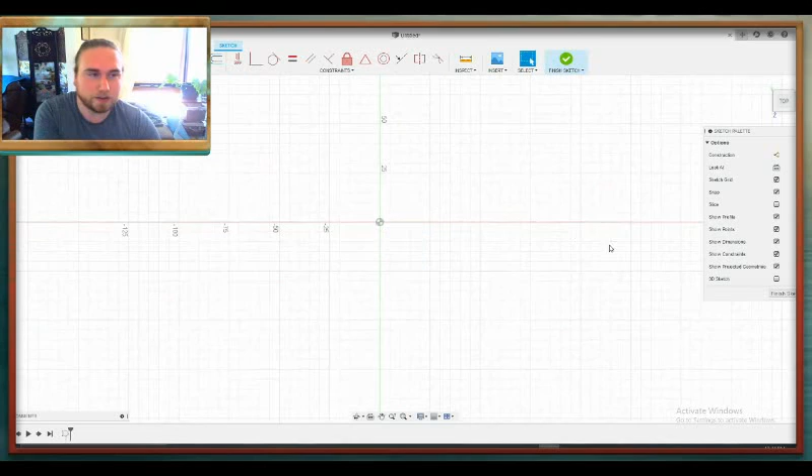Now, first thing is I'll make a quick file. This isn't part of it. You don't need to worry about this if you've already got a file. This is purely just to have something to play with. So we're going to use Fusion 360, make a quick square, put another little square on top of that, and I'm just going to chuck a circle in the middle of that square somewhere.

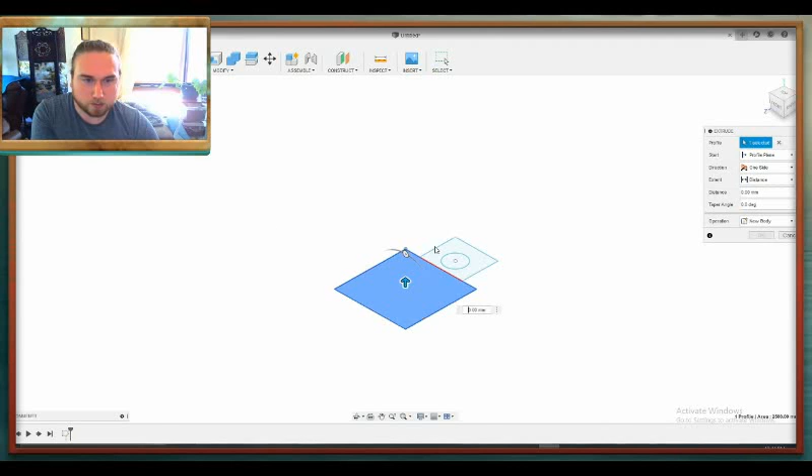Now, this doesn't really matter where it goes. Done. And we're just going to make that a 3D shape, so we're going to extrude it. You can just press E, and we'll make it a centimeter. Cool, so say this is some sort of bracket. I don't know, you're screwing this bottom plate into something, and then something's hooking onto this hole and pulling it this way, or pulling it up or down, or whatever we're going to do. So let's just say this.

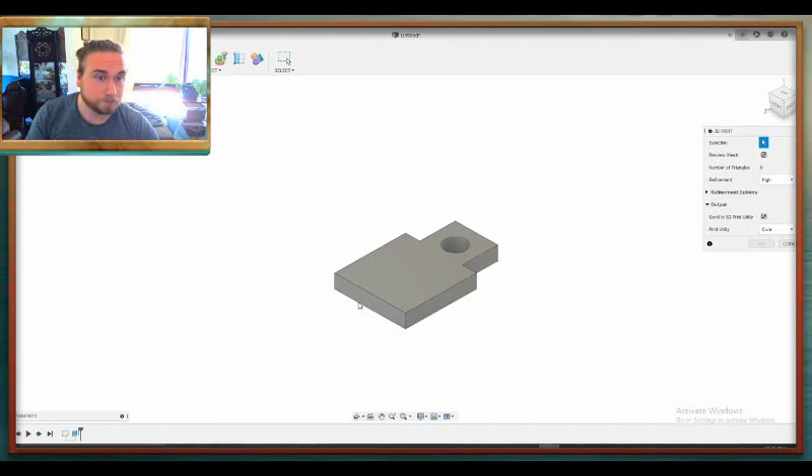There you go, make a 3D print, untick the Cura option, that never really seems to work for me. And then we've got a little file there. So now we have Cura here. And if we just chuck that over there. So, orienting your prints, to make sure that they are nice and strong.

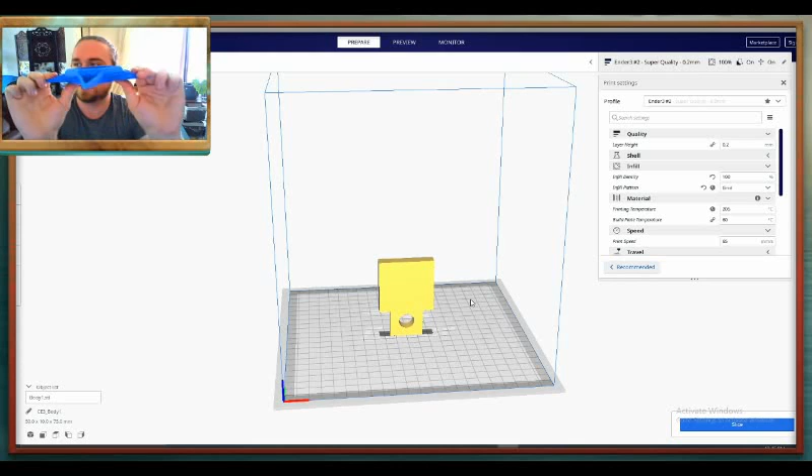Now, PLA isn't a hugely strong material, but it is fairly strong, especially if you orient them properly. Here's something I've designed, give it a good tug, and as long as you're against your layer lines, which is what we'll talk about, so say I'm pulling downwards, so the force is going down, my layer lines are going this way, they're actually resistive, that's going to take a fair bit of force to break that little leg off. It's the same sort of concept, so it's basic force analysis.

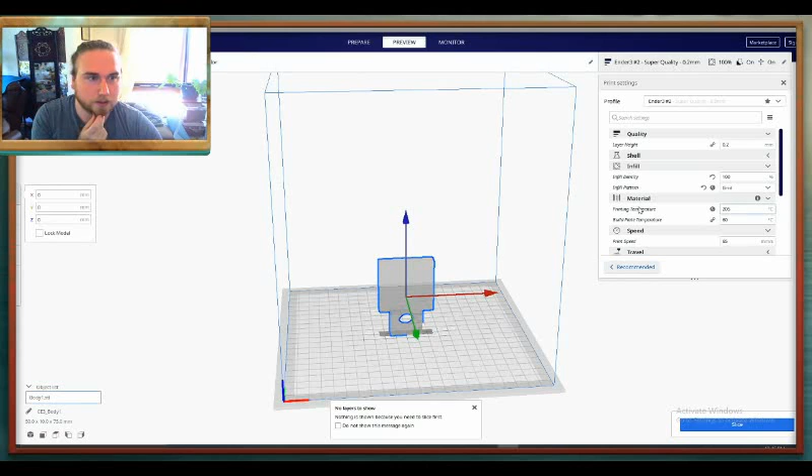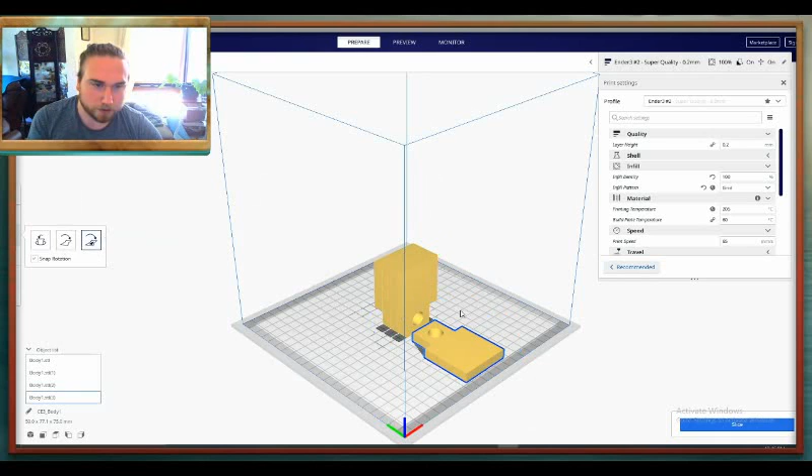So I'm just going to see if I can make this a preview, layer view, and maybe I need to slice it first. Actually, I'm going to duplicate this so we can have different orientations. So it's all about understanding where your layer lines are going to be. So your layer lines are obviously going to be going from the base up, as you probably know if you've 3D printed before. We'll do one of our prints like that. One of our prints, I'll make it the other way around. There we go, like that.

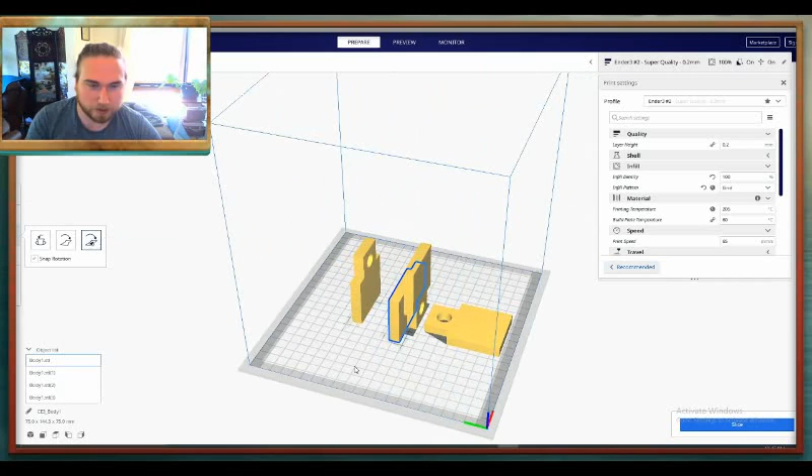One of them I'll do this way. And the other one, I'm just trying to think if there's any other directions really that matters. Not really. That'll probably do. Might just delete the other one. If we slice this, the reason I'm slicing is just to show you the layer lines. Go up the screen a little bit. So if we go preview, layer view.

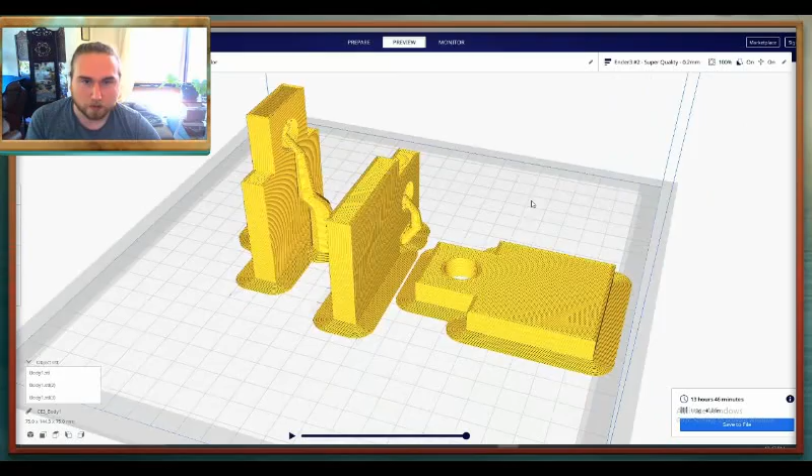So it's kind of hard to see, but there we go. You can see the layer lines going like this, like this, like this. So if we're trying to resist, say this piece is, like I said, maybe you've got 4 screw holes, this is getting screwed on, and then something's clipping onto this little piece, and it's pulling it. So maybe you're attaching a rope or string or something, and it's pulling it that way. So if we, I wonder if it's worth making this so I can draw on it.

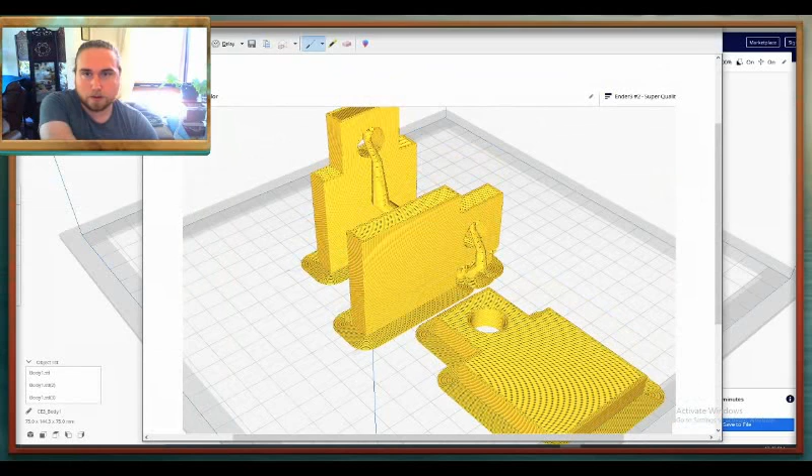So we have this little guy, and so the force is going to be going that way. So it's pulling on that hole. For this one, it's the same thing that way, and for this one up here, it's going straight up. This is what I mean by basic force analysis, sort of just understanding which way the force is going to

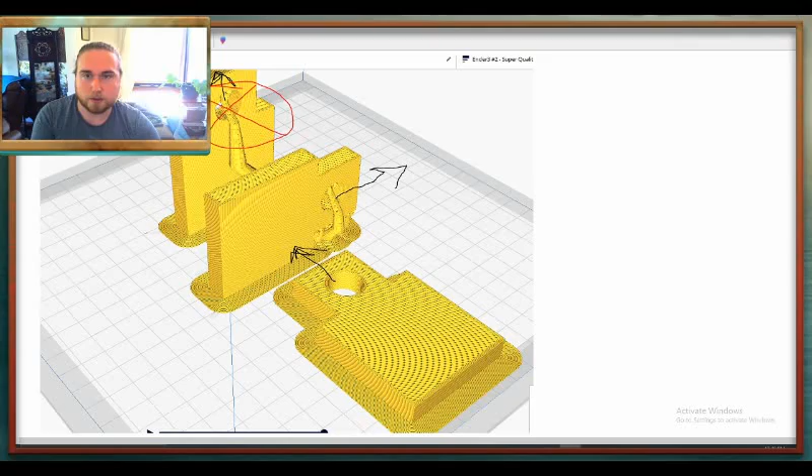be pulling. So the weakest one of these orientations, so it's exactly the same model, it's just how we're rotating it inside Cura. The weakest one is actually going to be this one over here, the one that's upright. This one. That's going to be the worst. And the reason that is, if we look over here, we've got our layer lines. Our layer lines are like this.

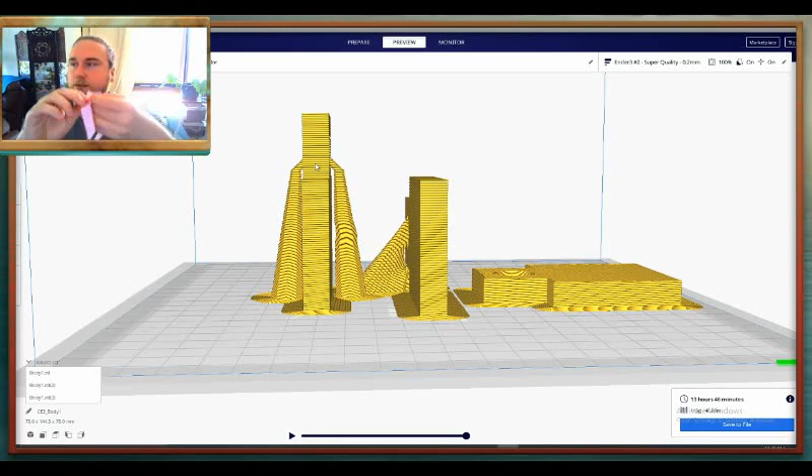If the force is pulling upwards, the weakness in 3D prints, aside from the fact that PLA isn't the strongest material, just inherently, the weakness in the actual 3D prints are these layer lines. They will delaminate, it's called, so the layer lines will separate. I mean, this was done in vase mode. If I sort of just pull this, the layer lines will just delaminate. Like, I'm not putting barely any strength in that.

Whereas if I pull it this way, it takes a lot more strength. Like, I'm pulling as hard as I can. That's not breaking. That's what I mean. This is just PLA. It's one layer. It's vase mode. The weakest print you could probably print on a 3D printer. And just purely by which way I was applying the force was showing how strong it was.

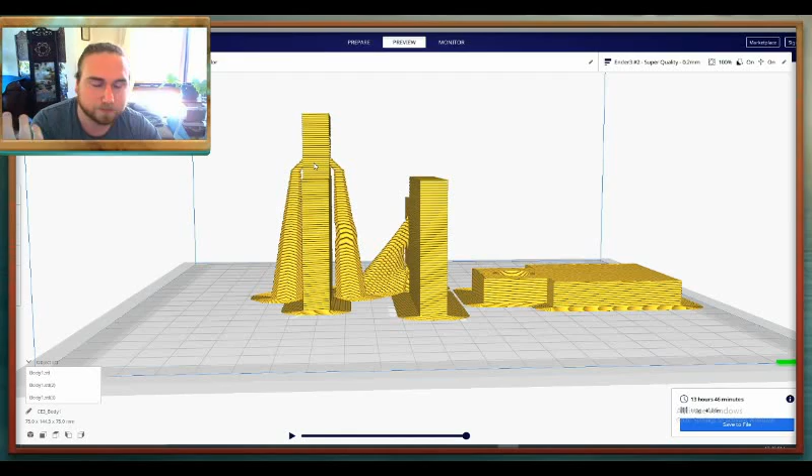So this one would be the absolute worst, the first one here, because the force is pulling straight up, and it's just going to pull those layer lines apart. And that's about it. These two would both be pretty strong. I would most likely choose this one here. Because the layer lines are going this way, they're totally on a different axis. But this is pulling this way, and the layer lines are going this way. So they're totally not going to interact with each other.

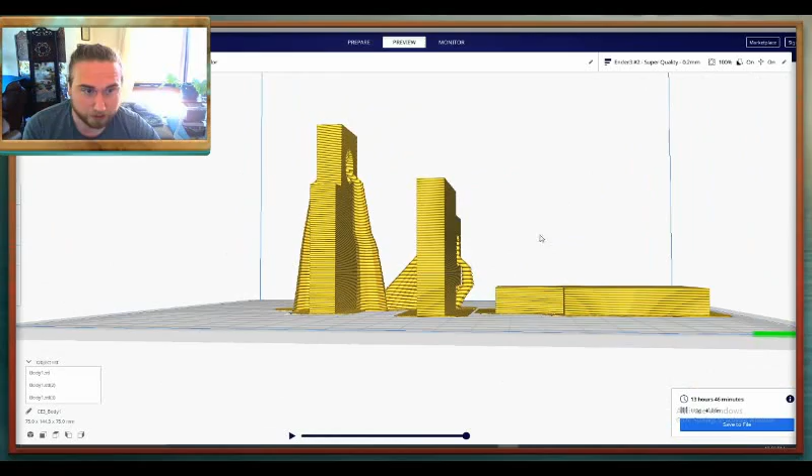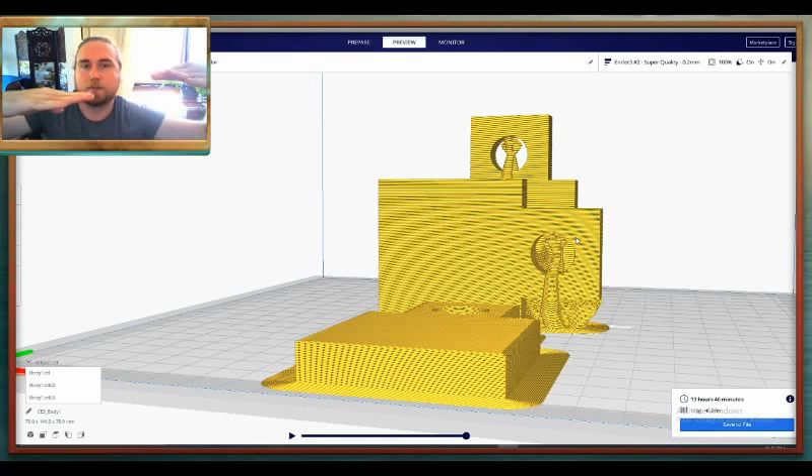The reason I'd probably choose this one over this one is this one you've still got layer lines, so it's pulling this way, and you have a potential here. So you have these layers stacking, and if you apply force this way, which is what's happening with this middle one, you might slip. These layer lines might slip out and pull. They're not delaminating and pulling off, but they still might slip.

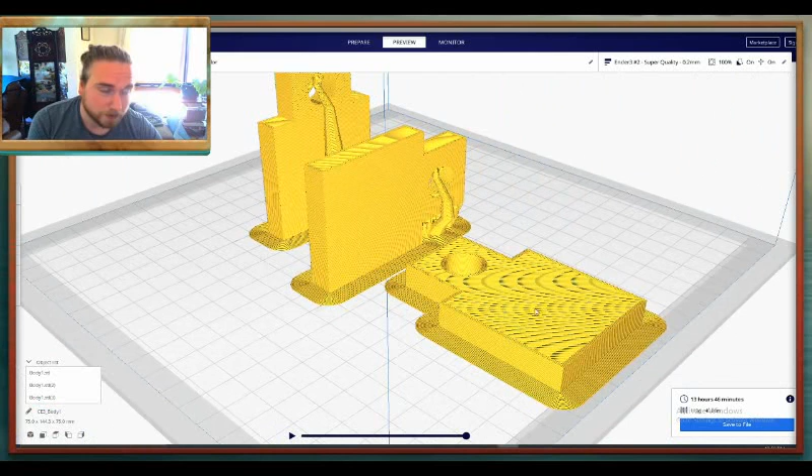So I would definitely choose this one, and this one also has the added benefit of not having any supports. I mean, you could probably get away with printing it without supports, but to print this underneath piece, this one wouldn't require any supports at all. So yeah, that's literally it. So we wouldn't use this one. We definitely wouldn't use that one. This would be our final piece that would be left.

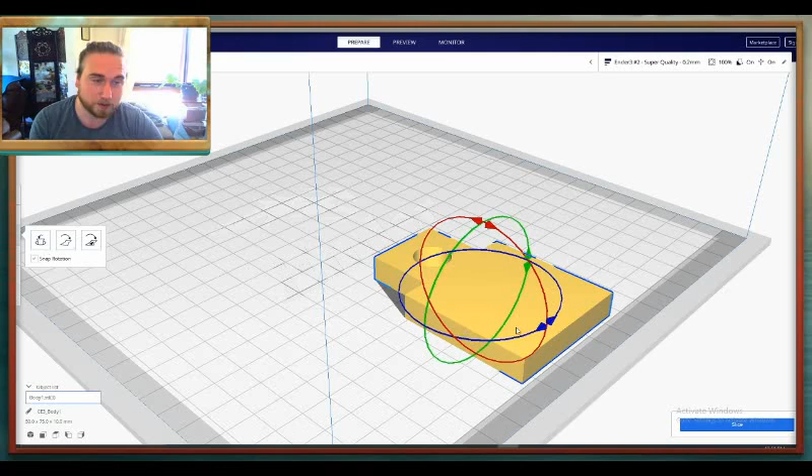You would print that, and it would hold fairly well. I mean, it's still PLA, it's still a fairly brittle material, but if you were to print this in PETG or something even stronger, that would be a really strong piece. So yeah, basic layer lines, you don't even need to know any modeling techniques, you don't even need to know how to use CAD programs or Fusion or anything like that. Just by simply rotating it, you've got a stronger print. So there we go, guys, that's it. All just by simply rotating a print on the print bed, you can get a much stronger piece and a much better result.